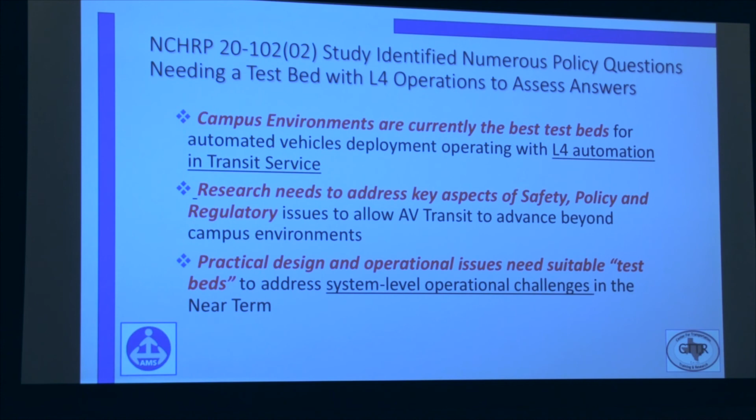There's a tendency in our group here and in the other conferences that deal with automated vehicle technology to think about the vehicle and the automation of the vehicle. But a vehicle can only serve the function I'm going to talk about if it's part of an integrated, automated system. And so that's a very important distinction. And I talk a lot to my peers and colleagues in Houston on Team Houston about the need for that.

We identified a year and a half ago the idea of the University District Circulator System. There's a cluster of universities that have 50,000 students. I'll show you where those are. There's 3 campuses side by side. Texas Southern University is where I'm associated with the Center for Transportation Training and Research. You can see it's a short distance from the Central Business District. Next to that is the University of Houston campus, and next to that is the University of Houston Energy Research campus. And these 3 form what we're calling the University District.

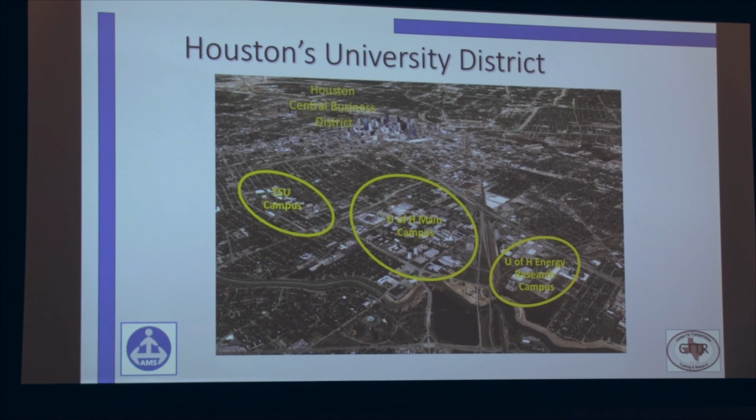Now, the project that Team Houston has identified as their first pilot deployment is the project that we conceived at TSU, and they've embraced it. And in fact, Houston Metro and the city of Houston are bringing significant money to the table to say we want to implement. And so this early deployment phase is what I'm talking to you about here today.

And so you can see that there's an excellent opportunity to do an early deployment of level 4 automation for large buses, probably ultimately platooning buses, that can then move directly into transit centers. They'll either board and alight passengers and go back directly in automation to the HOV lane, or they can transition to a level 3 automation if a driver needs to get on board and take the vehicle somewhere else.

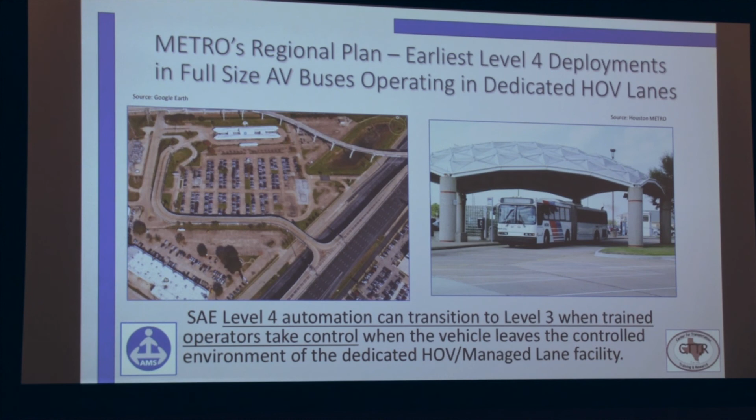So our university district, for its early deployment, has changed a little bit from what I described last year. Because now that Houston Metro has embraced it and is bringing money to the table, they want to do an early deployment that will focus on first mile, last mile connections to their transit infrastructure. We are going to do a phase 1 demonstration project pilot on the TSU campus that I'll describe to you first. I'll mention here as a little bit of an interest, and I'll summarize on this at the end. There's an RFP that comes out next week for transit automated system providers to come to the table and make proposals. I'll come back to that in a minute.

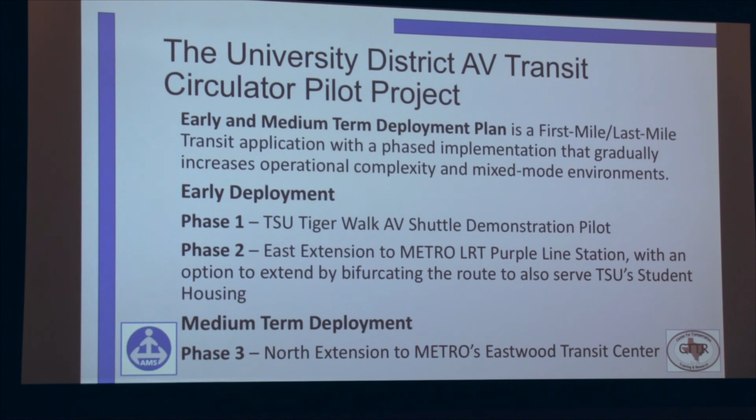Then there are subsequent phases that connect off campus on low activity streets to the first light rail station to create an interface, and then immediately after that, the next phase will connect a little bit further away to one of these major transit centers along a high capacity transit.

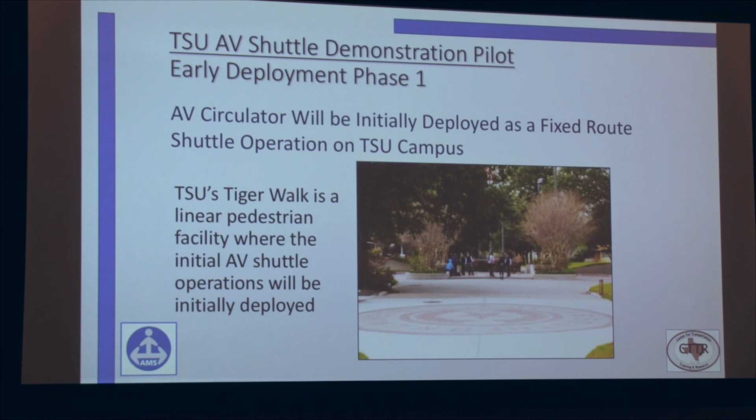We are concentrating on the features that will be conducive for the expansion to first mile, last mile service. We're very interested in ADA compliance. There's a board member on the Houston Metro board that is a paraplegic, and he's very focused on how this must be done. So there's options that have been talked about. One is a level platform, what I, in some of my studies, have called precision docking. That's been demonstrated in automated vehicles. That's a possibility, and we're already designing for initial purposes wooden platforms so we can test and adjust and see what works. And then the other option is to deploy wheelchair ramps.

And there are technologies that are moving in this direction. The problem you come into is that the ADA criteria and regulations from FTA thus far create maximum ramp angles for a condition where you might be 10 inches off the ground. That would mean the ramp to comply with existing regulations might have to be 8 or 10 feet long. So we have to think about how we're going to fit in with ADA regulations or work with FTA on how they're going to adjust regulations.

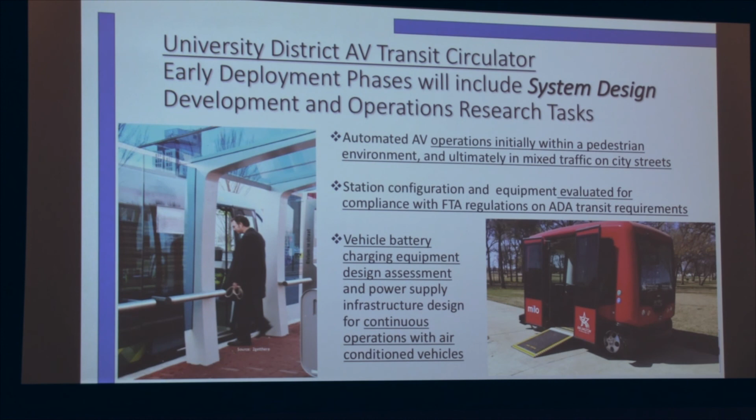Other things obviously are power charging. Air conditioning is critical in Houston. We have to have air conditioning because of our heat and humidity. These are all major challenges we're going to be getting our first taste of and working with the selected supplier in the demonstration phase.

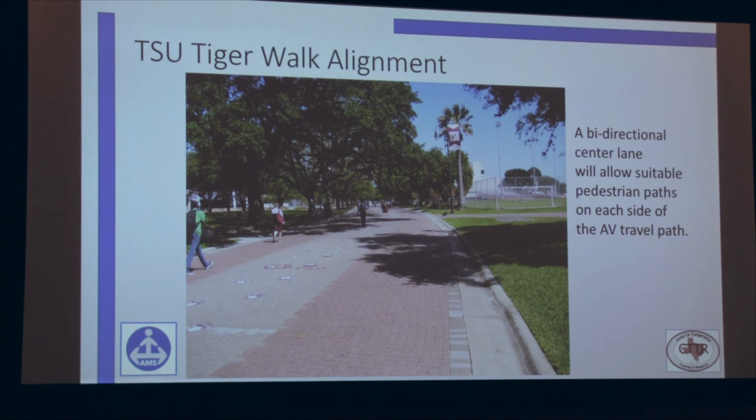Now, Tiger Walk is built along a street alignment. Wheeler Avenue was converted at the edge of campus into Tiger Walk. And so as you move down Tiger Walk, it's easy to see, conveniently, because they've used different colored tiles. Down the middle is where our vehicle will run. And on the side will be where the pedestrian activity occurs. So this is a first level of complexity that we're going to be evaluating, testing, learning from as we are writing, if you will, our specifications for the ultimate deployment.

Did I go the wrong way?

I think I did. Okay.

One of the key aspects that's critical to our technology providers, I want you to understand that, is that we have a large amount of tree canopy. For GPS purposes, that's a huge problem. And so other equipment and systems for the vehicle to know exactly where it is under conditions of especially a combination of heavy cloud cover, which we have all the time in Houston, and tree canopy is very important for us to address.

Metro is doing it. Oh, I'm sorry. That's better, isn't it? Sorry about that.

This is a little bit complicated. It's why it requires a systems look. Once you go beyond the demonstration phase, just to run on Tiger Walk, we're going to have a supervisory system that's holding vehicles, dispatching them to where they can pass at stations.

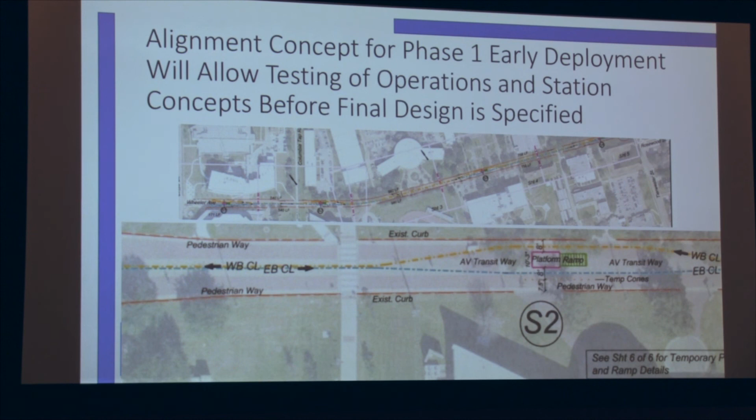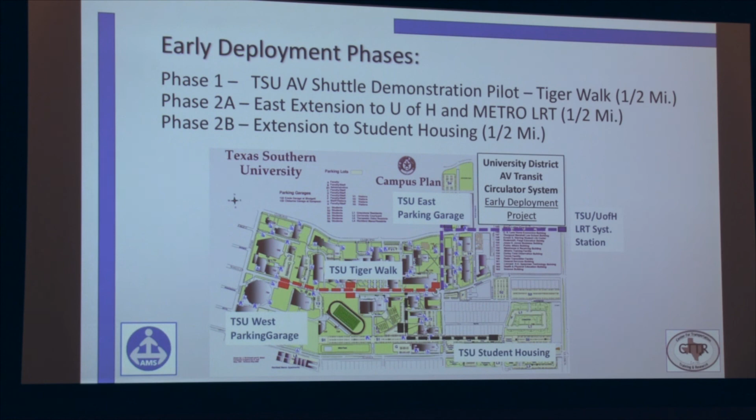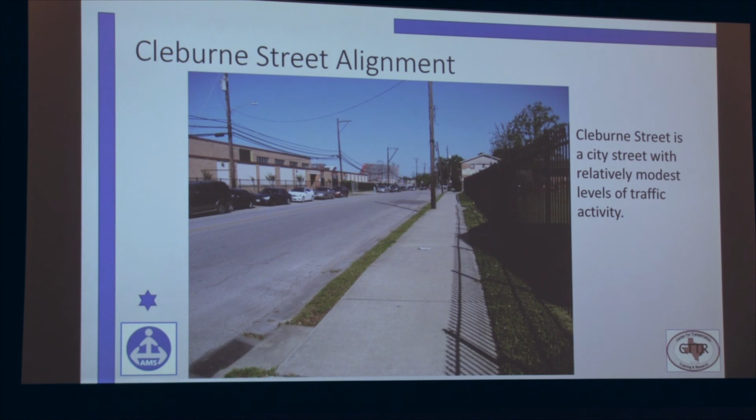So the next phase goes over to the right, to the edge of U of H campus. Let me briefly describe that. I'm going to speed up here. This is Cleburne Street. We're going to connect onto Cleburne Street. It's a low activity street. It's currently in a program to be rebuilt by the county, and so that's one of the timing aspects of when we will be able to get onto Cleburne Street in the next couple of years. But we may have some options for early phase deployment, such as over to student housing, if we're still waiting on Cleburne Street to be finished.

But this is the first higher level complexity as we approach. This is Scott, a major arterial, and directly adjacent to Scott is a light rail system. And so there's a signalized intersection that we would need to go through from Cleburne Street onto U of H campus that crosses both of these high activity transportation facilities. This is a look on the U of H campus in a parking area where we would be building a station, and that's the light rail station directly adjacent. So that's phase 2. That would get us first toe in the water in mixed traffic and connection to first mile, last mile at this light rail station.

Now for the longer term, we're looking at a circulator system that moves throughout the large campuses. This was where analytically I was going last year, as we want to get heavily into analysis of demand response, mobility as a service in a larger campus. But now we're redirected because we have to go where the money is, and that is we're redirected in the early deployment phases to the connections to transit.

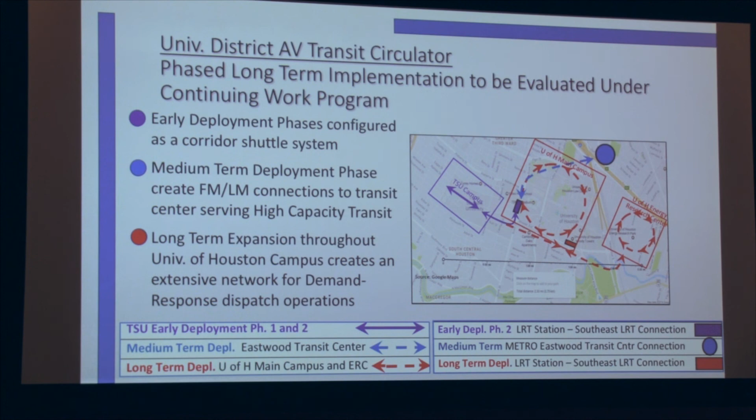So what I'll note from the color code, the blue circle in the map up on the right is a major transit center that Metro wants to get to in the medium term deployment phase once we get to the light rail station. And so this is a graphic that shows the Eastwood Transit Center. You can see down the middle of that freeway is the protected HOV lane and the direct connector that connects over into Eastwood Transit Center.

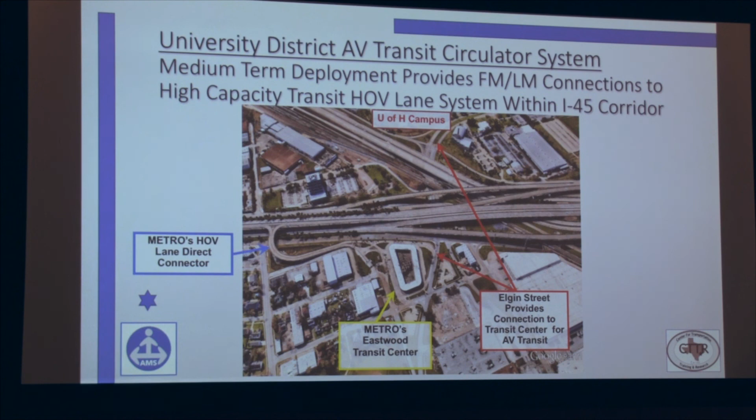So this is where, in hopefully not too many years, level 4 buses will be coming into this transit center, and our AV circulator, first mile, last mile system will come down Elgin Street underneath that maze of freeway and railroad infrastructure, and come directly into Eastwood Transit Center for transfer as a first mile, last mile. And this will be a true high capacity transit connection, first mile, last mile service.

So let me close with a couple of thoughts. Why is this important? For the university, it has research tasks that focus us on the operational challenges of deployment of technology, not only in a heavy pedestrian environment, but also in mixed traffic. We'll look at key regulatory issues with FTA and other governmental entities concerning how we serve ADA, how we serve the whole public, and then finally we'll look at first mile, last mile connectivity to Houston Metro for the student populations.

Now going beyond, this is why it's so important. Remember, we're going to double in size. We'll pass Chicago.